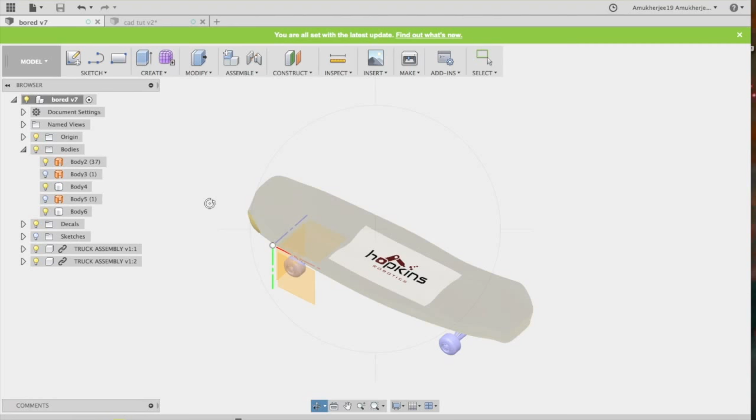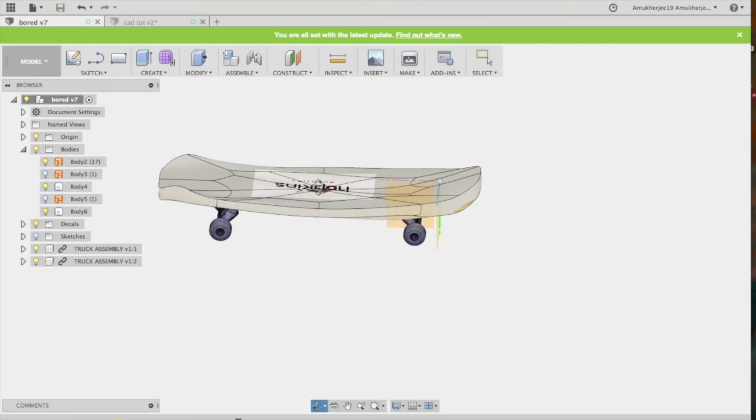In this video, I want to introduce you to CAD software in Fusion 360. If you don't have any experience with CAD, it stands for Computer Aided Design, and it allows you to build your robot before building it for real. I'm doing this in the context of the FTC competition, so you can plan out your robot before wasting time and money building prototypes physically.

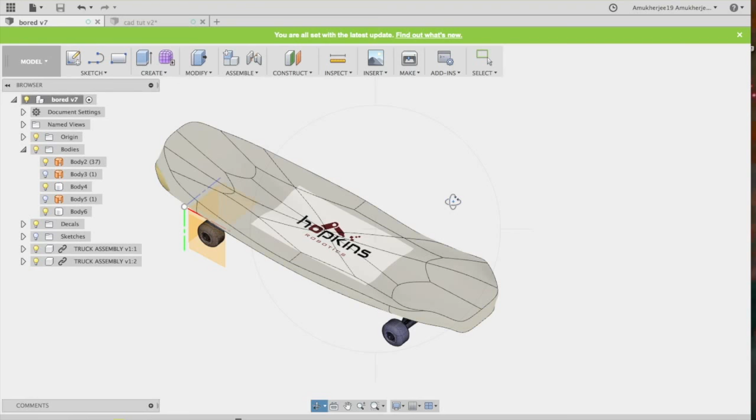Fusion 360 is a relatively new cloud-based software, which means you can collaborate online with others, just like on Google Docs. It's a super useful skill for a robotics team to have, and the software is really easy to learn, as you'll see in this video.

I'm just going to show you the basics, why we CAD in the first place, basically the advantages, and then I'll show you how to import and assemble Tetrix parts in Fusion 360 for your robot's design. If you have moving parts, you can even animate them in the software and make sure that all your moving components of your robot do their job and don't intersect with each other and mess up your design. So basically you can troubleshoot in the software before you even start building and putting the parts list together.

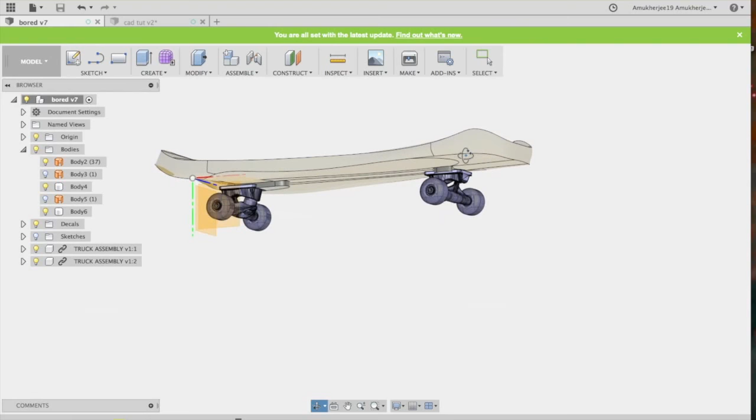This allows you to save a lot of time and money on your robot by getting all the troubleshooting issues out of the way. Also, if you're an FTC team, judges at qualifier competitions and state competitions really like to see teams that CAD their designs. It shows forethought and a lot of dedication, and it'll win you points for Inspire or Think Awards. It's also really simple to learn, so it's quite worth it.

Let's actually get started. First, you have to download Fusion 360. It's a free software for students. I'll link this in the description below. You just have to create an account, register, and download. It's very simple, very quick.

Once you've downloaded it, you can start assembling these Tetrix parts. I'm using Tetrix in this example because it's pretty popular in the FTC community and super easy to build.

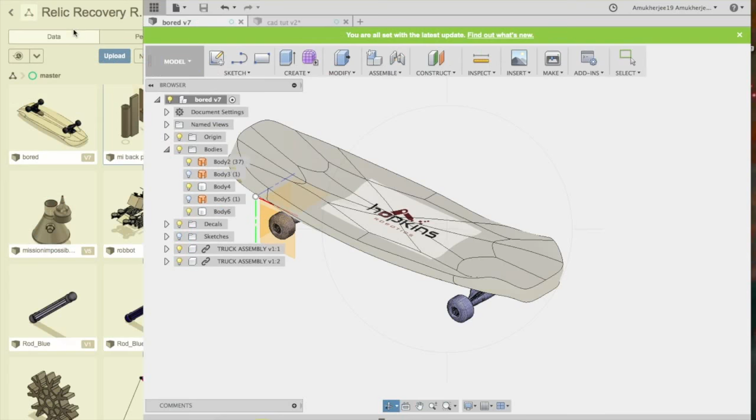So this is Fusion 360, I've already downloaded it. Before we get started, we have to actually download the STL files that we're going to be using for our robot.

STL files are basically 3D CAD files that you can import, like virtual parts. I'll link this in the description below. It's a GrabCAD site where you can download all sorts of Tetrix parts. You do have to create a GrabCAD account, but that's free, very quick to do. So I'll just download the files.

It'll show up as a zip. Once it finishes downloading, let's wait a little bit. Alright, here we go, we can go into Finder, unzip this file, open that. Let's see, Tetrix Kit FTC, and we have all of these STP files, which are basically equivalent to STL files. So how do I get these in?

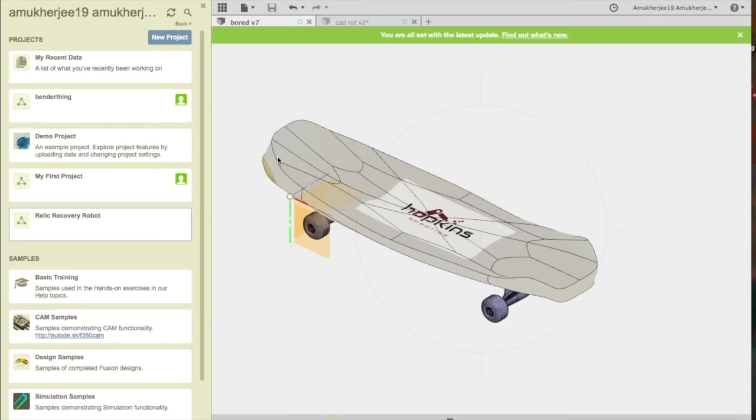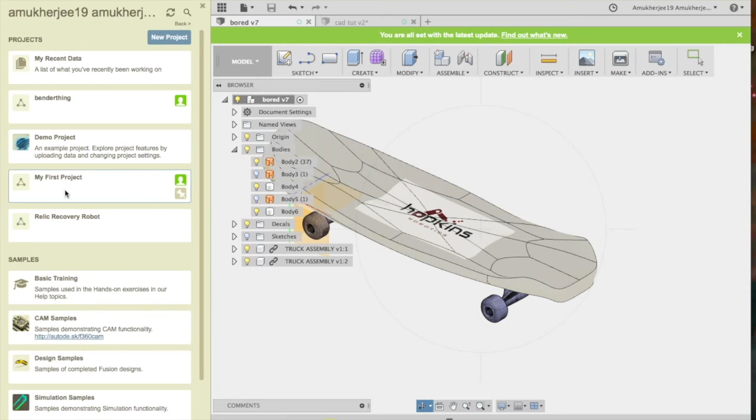When you open Fusion 360, you'll see this screen without the skateboard, obviously - it'll be blank. You want to go to the top left corner where it says Show Data Panel. This is where you can keep all of the references, all the files that you'll reference in your CAD project. You want to open my first project - that'll be default, and you can upload STP files, STL files.

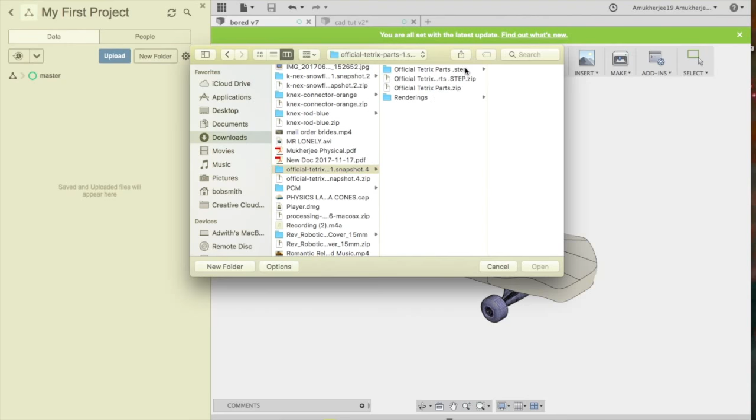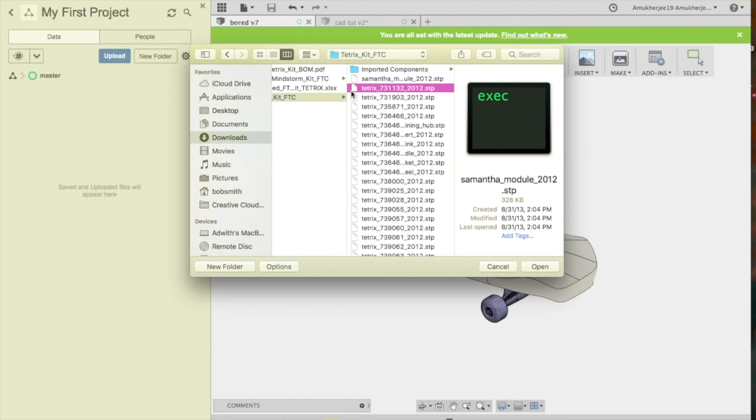So I'm going to select the files that I just downloaded. Let's find it in downloads - official Tetrix parts, I think. Tetrix, bring it up to Tetrix Kit FTC. I'm just going to select all of these - it's a lot of parts, so everything you'll need. You just hit open and upload, and it'll all start uploading.

There you go. It'll take a while because it's a lot of stuff, but it should be done in like 5 to 10 minutes. Then you can get started in assembling, and start building your robot.

So I've downloaded all of the STEP files and renamed them so it's easier to access. Here they are - I put them in nice, neat folders so I can easily access them. Now you can do that too, it doesn't take that much time, just rename them. So you're going to be open with an untitled project.

You want to name it by Command S or Control S, save it, and let's name it. Let's see, CAD tutorial. Save.